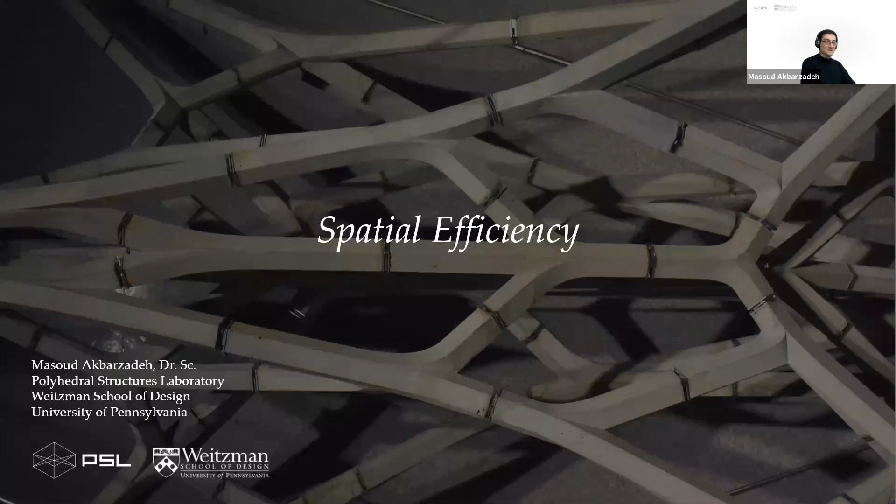Hello, everyone. My name is Masoud Akbarzadeh, and as mentioned before, I'm the director of Polyhedral Structures Lab and an assistant professor of architecture and structures at the Weitzman School of Design. I'm going to talk about spatial efficiency in my lecture. I will give you a brief introduction to the mission statement of my lab, introduce the graphical form finding methods that are quite intuitive but very exciting, and then give you an introduction to my main research area, which is the three-dimensional version of that graphical form finding.

And then show you some design methodology that we develop in the lab together with educational and computational packages and tools, including some theoretical research that involves both the mathematical side of the work and material and construction exploration. And finally, I conclude with nature and natural structures. So disclaimer, there's not going to be too much about robotics. That's what I'm hoping to develop, a kind of common ground so we can work together with the faculty at GRASP to develop that aspect of the work.

I established Polyhedral Structures Lab in January 2017, and currently I have 3 PhD students and 1 postdoc from ETH Zurich, and 2 other postdocs that I had last year. One of them became an assistant professor at City College in New York, and the other at University of Montreal, but they stay involved even today with the projects they initiated with me.

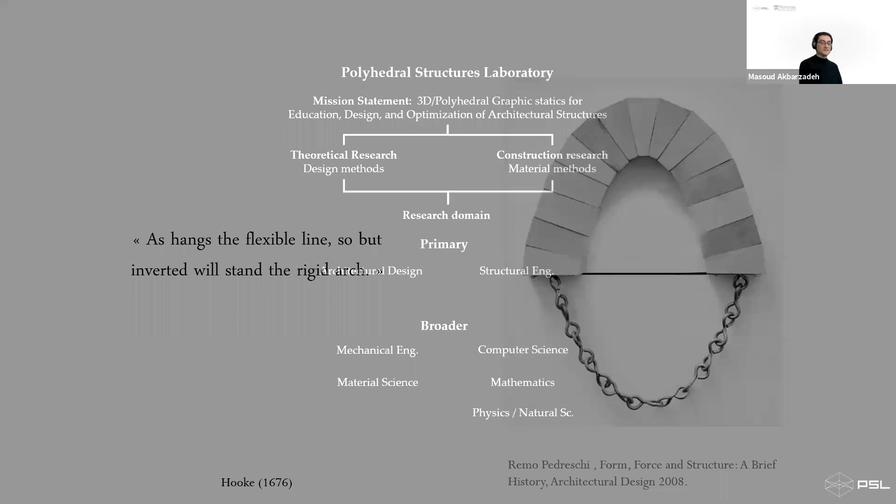I would say the primary domain of the activities is within the field of architectural design and structural engineering. But recently we were able to expand this domain to mechanical engineering, material science, computer science, mathematics, and hopefully soon natural sciences too. So before I talk about my research, I'm going to start with a simple but super important concept that introduces the efficiency in the geometry of the structures that we are dealing with.

I don't know whether you've been acquainted with this concept, but Robert Hooke in 1676 introduced a really interesting concept: if you hang a piece of chain, based on its own self-weight, it would create a form that is called a funicular form or a catenary form, and this form is in pure tension. More importantly, if you reverse that form, it would be in pure compression. Meaning that if you take a section at any point along the geometry of this form, the only internal force that you get in the section is a tensile or compressive force.

In fact, we don't have any bending moment, and always the direction of the internal force is perpendicular to the cross section, which makes the system quite efficient. So in fact, material aligns itself with the direction of internal force. So you don't have any redundancy of the construction.

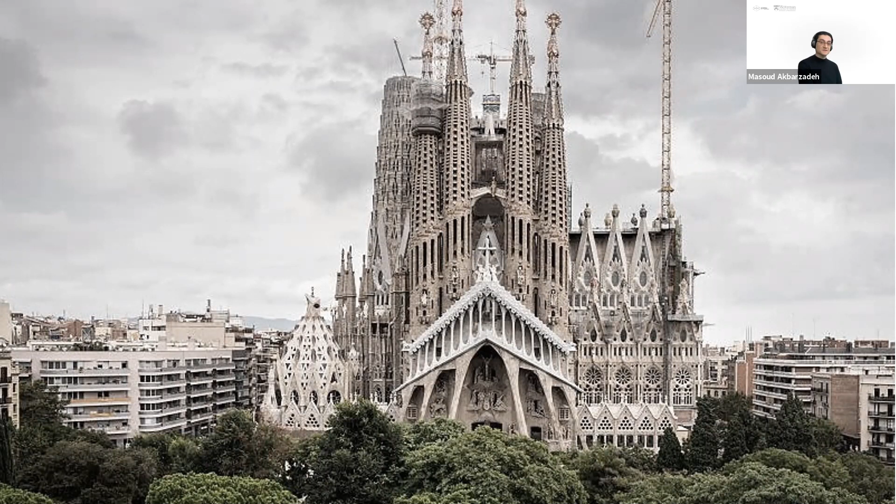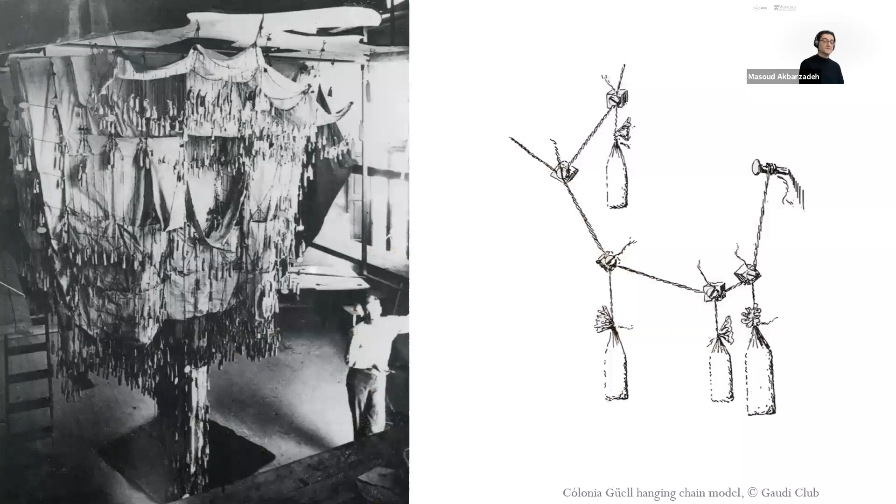If you know this concept, probably you know that Gaudi has used or embraced this concept really well in his work. In fact, Gaudi was more than a designer. He was a magician, I can call, who could elegantly combine engineering principles with architectural design. And he was taking this simple concept and building structural models for his buildings prior to any architectural design. So he was coming up with the structural form, and then on top of the structural form, he was adding the architectural detail to it.

That's probably the reason that his buildings are becoming one of the exemplary in the field that does not have any time and it doesn't age. So through the history of building construction, if you look at, there are many examples that in all these examples, in fact, the designers tried to use these funicular forms and basically utilize these funicular forms in developing spaces that clearly shows the efficiency in the flow of forces or the use of material together with the elegance, which is the inherent property of using such elegant forms.

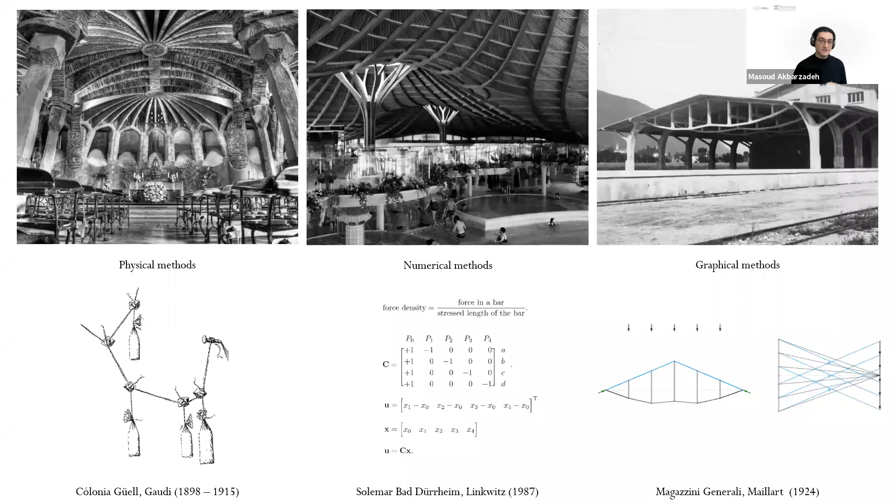So the problem of finding funicular form has become a point of interest among practitioners, researchers, designers, and engineers in the field of structural design and architecture. Right? Primarily speaking, there are three directions or the methods that you can find these funicular forms or efficient structural forms. One is the method that proposed by Hooke, and Gaudi used it a lot, which is physical form finding technique. The other one is numerical method that superseded the physical. And the last category is actually graphical.

I'm going to mainly talk about graphical because it is based on geometry. Geometry is the common language between engineers and architects. It's intuitive. Everything is explicit and you can see everything. You don't have to calculate everything, which is more preferable for architects and designers. But in the meantime, I'll show how powerful this tool is and what you can do with that.

So probably one of the most prominent examples of graphical analysis and basically instances that mathematicians became interested in geometry-based equilibrium principles are the works of French mathematician Varignon. So he was interested to investigate the geometry of funicular forms that are pure tension or compression and find geometric techniques to find the magnitude of the force and describe these forms or their equilibriums.

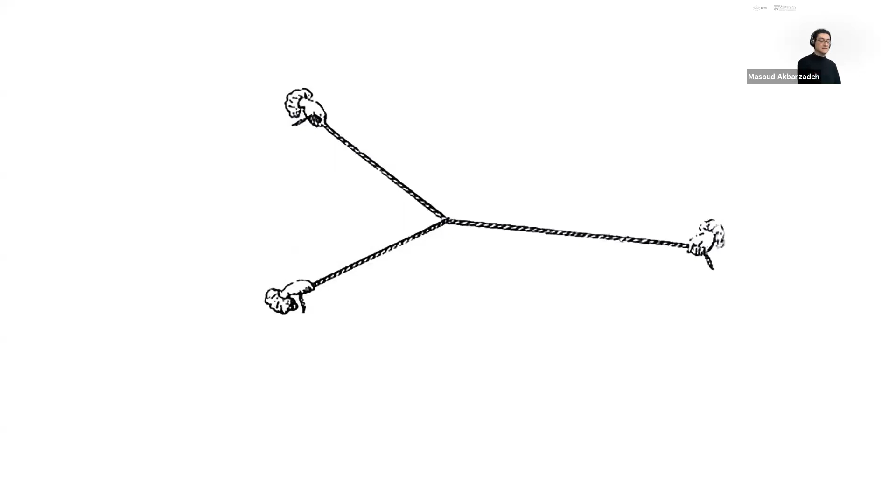So simply put, if you start with a piece of rope that has been pulled from three sides, it's just enough that you put a line parallel to each of the rope. These lines together would create a closed polygon. This closed polygon basically tells you that the system is in equilibrium. And if you measure each length of this polygon, which tells you how much force goes into each piece of rope. You probably had this concept in high school as a free body diagram or closed polygon of forces. That's exactly the same thing.

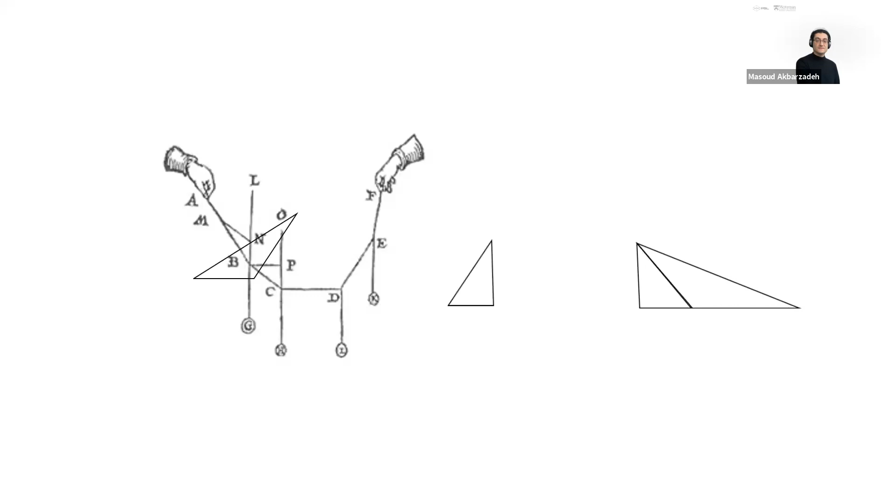So simple enough, if you have a funicular form that you have basically the direction of the applied loads and the geometry, you know that each node, the equilibrium of each node can be represented by the closed polygon. And thus, these polygons together would create a force distribution or the geometry of the force distribution that explains the equilibrium and more importantly, describes the geometry, because each edge of your geometry is perpendicular to each edge of this polygon.

This principle, simple enough, became the basis of the method that was called later graphic statics, or originally graphical statics by Culmann at ETH Zurich in 1866. So that was the first person who actually put this together in the form of a book and started to teach that to engineering and architecture students.

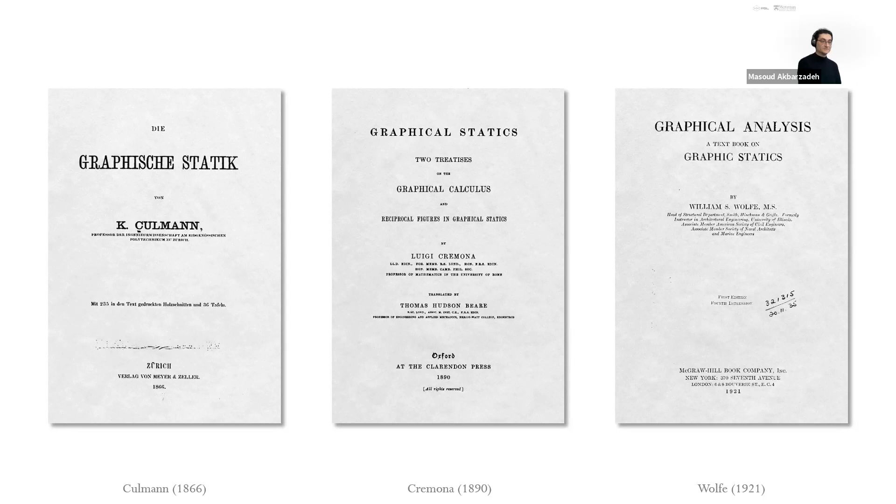So what is graphical statics? Basically, graphical statics is a tool in which you have a funicular form, that you can basically find a funicular form that is shown on the left. And you have another diagram, which is again a geometric diagram. That is the force diagram, and that represents the equilibrium of forces within that funicular form. So everything is explicit. How?

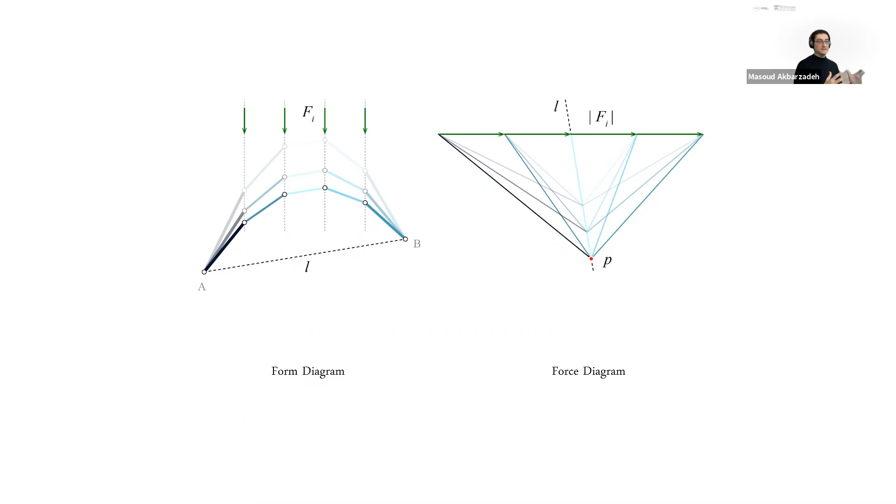We know that per node in your funicular form, you should have a closed polygon. And basically, if you measure the length of that closed polygon, that tells you how much force will go into that. More importantly, because these two diagrams are topologically reciprocal and geometrically perpendicular, you can play with the geometry of one and then see the effect of that play in the other geometry. You can basically control your funicular height and see the magnitude of the forces are basically changing accordingly, right?

Again, because everything is described using geometry, you can optimize geometrically really, really fast. For instance, in this method, the force diagram is constrained to a circle. As a result, the edge length equals the radii of the circle, right? So that means that the bottom chord of your structure would have a constant force in it. So immediately you can see why the optimization is happening and how you can control it, right?

So what does that mean in terms of construction efficiency? Well, I'll take you to the City Hall subway station in New York City. This was built in 1913 by Guastavino, and it's called Guastavino vaulting. If you didn't know, the entire weight of this City Hall actually sits on top of this vault system that only consists of 4 centimeters of 2-layer clay tile bricks with no reinforcement.

So you can imagine that it's been living for almost 100 years, even more than that. And without any reinforcement, it works really well. So why does this work? Because Guastavino, as you see in the image, was using graphical methods to find that efficient form, which is that arch, and he built that efficient form using 2 layers of clay tiles, each layer less than an inch thick.

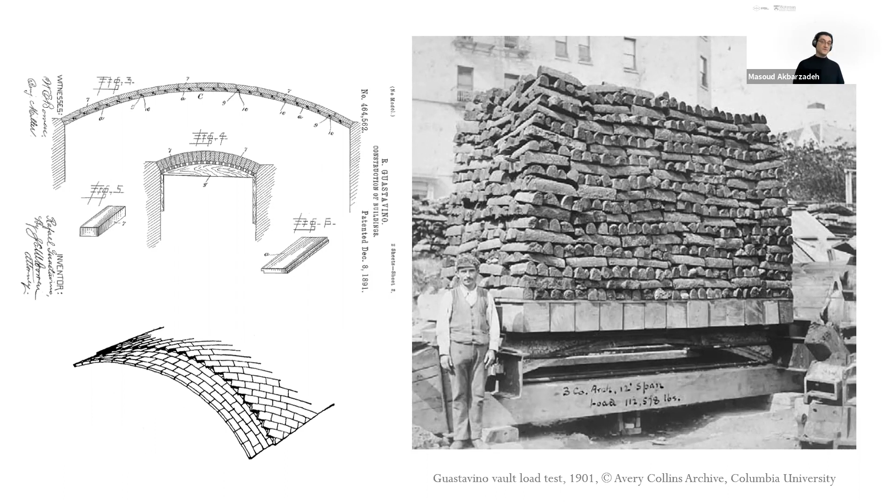And then he's showing the load testing of that immediately in front of you. This is one of his built arches, and it can take up to 500 times its own weight. That clearly shows that without any reinforcement, you can still design efficient systems, right?

Even Gaudi, who is famous for his physical form finding technique, used a lot of graphic statics to describe the geometries. This is Park Güell. If you haven't been there, you should definitely go visit this place. This is fantastic. Many people around the same time who had to work with the construction material, which was stone and masonry at the time, had to become masters in using graphical methods because the force flow that keeps the entire masonry structure in compression was necessary.

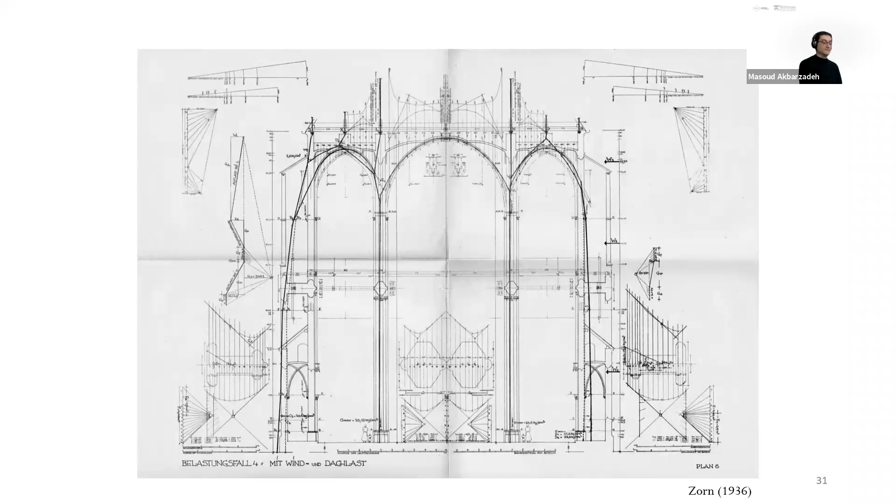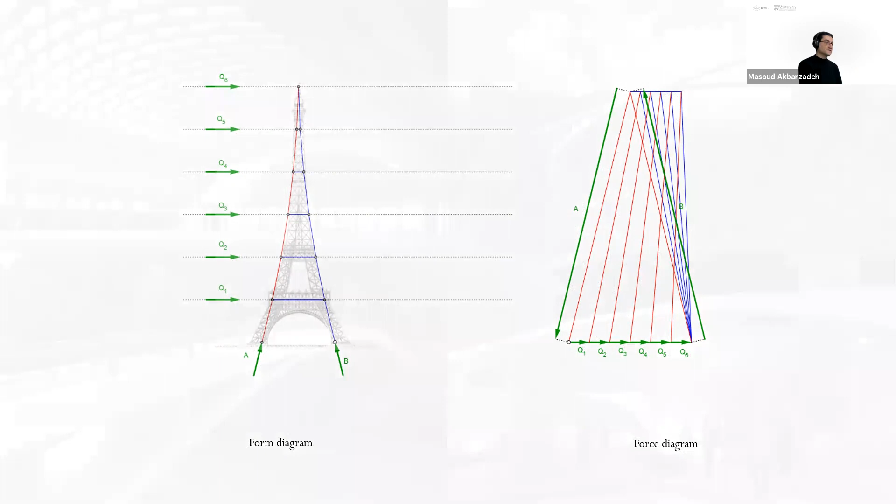This is another image of a cathedral designed by Zorn, and you can see the diagrams of forces on the corners and basically the funicular form of the arch. All right, if you didn't know, even the Eiffel Tower has been designed using graphical methods. Again, there are many examples of the use of graphical methods in the design and construction of buildings, bridges and really efficient arch structures.

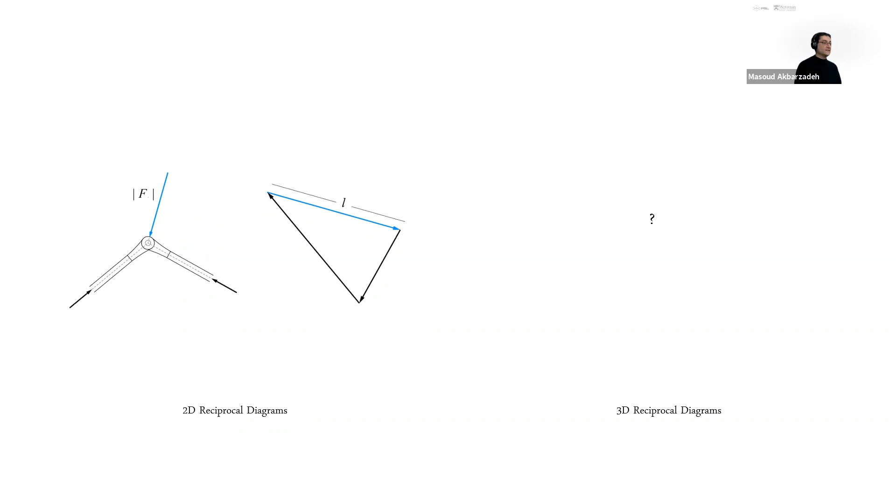But again, today with the computational tools and representational medium that we have, it's much easier to explore the potential of using this method. Anyways, in 2D, the equilibrium of a single node can be represented by a closed polygon of forces, simple enough that you can measure the edge length, and this measures the magnitude of the force in the system. What is the three-dimensional equivalent of that?

So I remember that I searched the history, the literature, and I realized that William John Macquorn Rankine, who was a mechanical engineer, by the way, in 1864 published a publication which is only half a page. This is the entire publication, from start to end. As you see, it's just 3 paragraphs in Philosophical Magazine. No illustration, no proof, nothing.

And he calls it Principle of the Equilibrium of Polyhedral Frames. And the first sentence is actually a referral to his own book, mentioning that this is the three-dimensional version of what he already proved in 2D. But the theorem is in the main paragraph, and it's only a 1-sentence paragraph. Probably that was the reason no one actually looked at this paragraph, because it was really hard to understand. I'm not going to read it for you. If you have a chance, search it online, try to read it and see what you can imagine from that.

But anyways, the gist of the story is that if in 2D the equilibrium of a node can be represented by a closed polygon, in 3D a closed polyhedron of forces can represent a spatial node in equilibrium, where each member of that node is perpendicular to a face of that force polyhedron. If in 2D the length was representing the magnitude of the force, here the area represents the magnitude of the force.

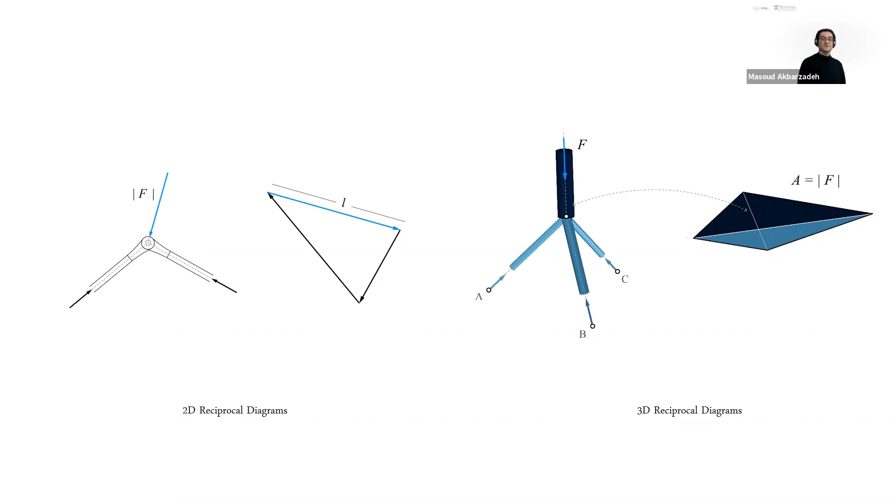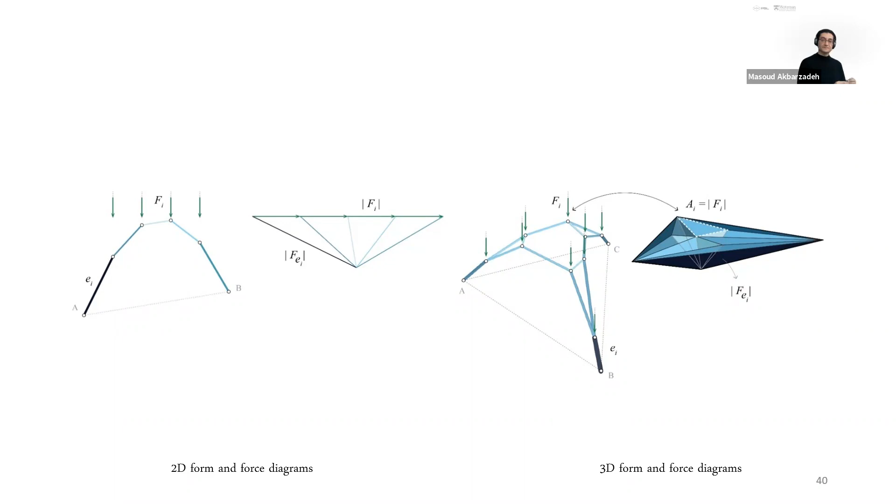If you're interested in proving that, use Stokes' theorem. Anyways, I was able to take the 2D graphical statics that existed for 150 years, I would say, to the three-dimensional version of graphical statics that are based on reciprocal polyhedral diagrams. The immediate outcome of this is that a single polyhedron that is convex and closed can represent a node in equilibrium in space.

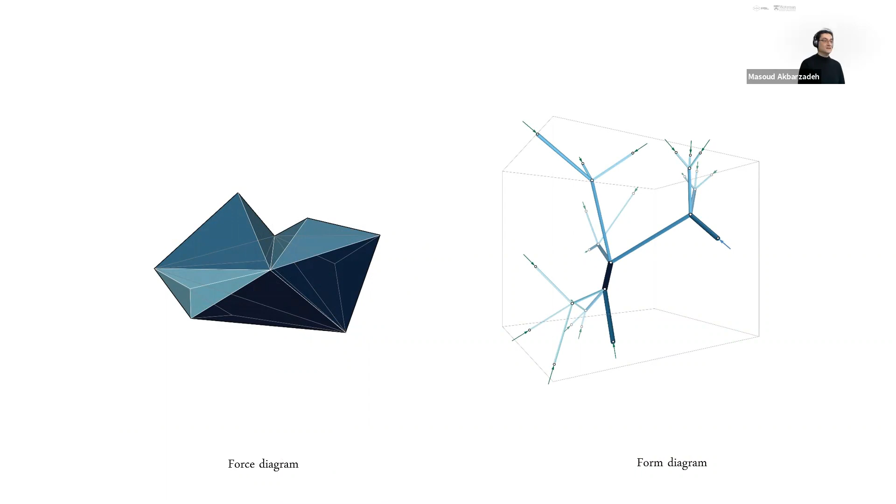That also means that if you have a single polyhedron, you can start adding more polyhedrons of forces to that, and together they can actually describe the force distribution of a spatial funicular form that was previously really difficult to find, only through certain form finding techniques. And if you had gravity and not gravity, it was really difficult. But with this method, you can immediately construct that and control its topology.

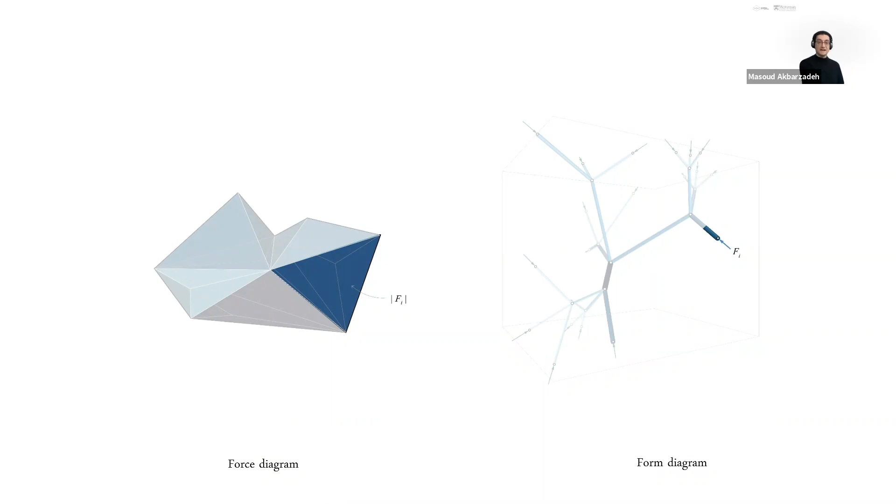Why? Because every node within your network can be described by a closed polyhedron, meaning the equilibrium of that node. And the magnitude of the force in each member or each thrust is represented by the area of the corresponding face in the force diagram. With a little bit of patience, you're able to assemble force diagrams from which you can derive non-conventional spatial structural forms. So this is the key.

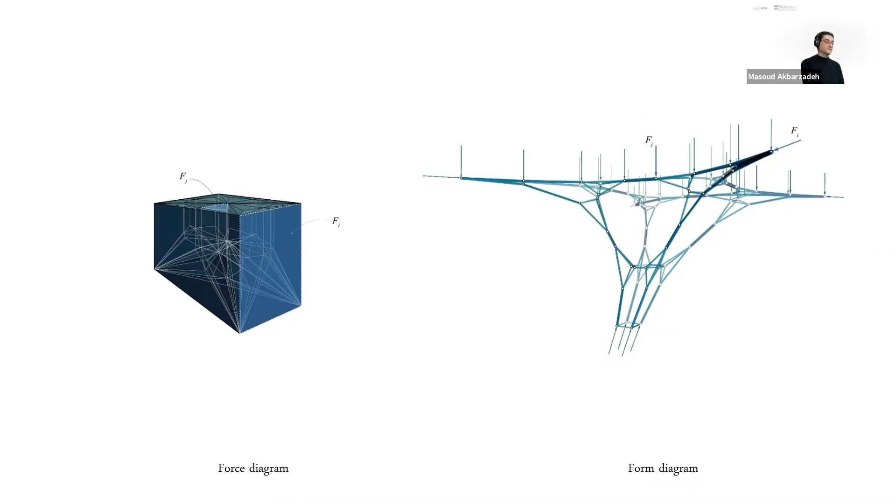We do not start from the form diagram. We do not start from any arbitrary form and try to optimize it. We start from a force distribution that we know is already optimized. We know that any structural form that you extract from that would be in equilibrium. So we can control the topology and also guarantee that the result would be in compression or tension or the combined version of this.

This is something that I teach to graduate level students at Weitzman, and they make physical models of that. The moment they make these spatial tensile models, they realize that the entire thing actually works and the principle holds. Through these they're able to explore a variety of different spatial equilibriums that can be used as architectural spaces, architectural structures.

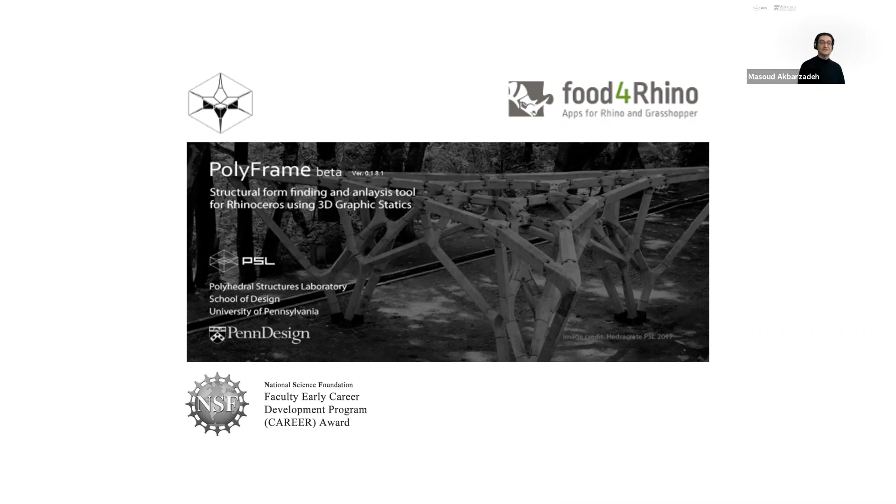Obviously, if you want to do this by hand, it's not feasible. It's going to take a long time. So we developed a computational tool for that. It's called Polyframe. It's a free plugin for Rhino.

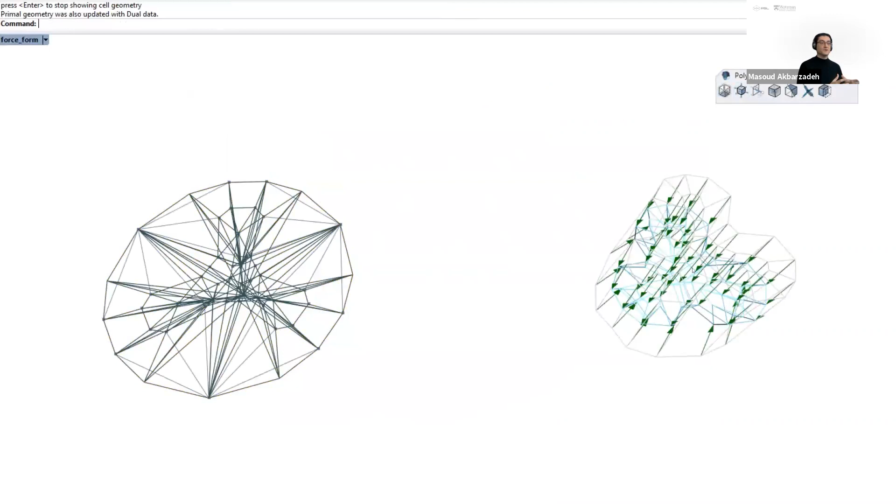There you can design the geometry of your force diagram and extract the topology and the geometry of the form that would be in equilibrium according to the initial force distribution that you as a designer chose. You can constrain your geometry and play with the geometric degrees of freedom, the edge lengths, within the states of equilibrium without breaking that equilibrium between the form and the force diagram.

Moving to the first built structure, this was built as the first manifest of the method, in a workshop that I taught for the first time after my PhD, right when I started my career at Penn, at the Institute of Contemporary Architecture in Tehran. The students really pushed it. I was afraid whether this was going to work to begin with, but they really wanted to build a structure, and they finally did it. That's fantastic.

What you see in this structure is a self-standing structural form. It's like a branching system, but it is quite unique in that the entire body, except the top chord, stays in pure compression, with almost zero bending moment. The top chord is actually in pure tension, and the self-weight of the top chord keeps the rest of the members underneath in equilibrium.

What you see is a structure of 10.80 meters by 9.30 meters. In the widest span it's 5.40 meters, and the height is 2.80. Because we were using geometry-based structural design methods, we were able to define the boundary conditions in advance, and then we designed it as a compression-only spatial structure. So there are support locations at the top chord of the system and also on the bottom.

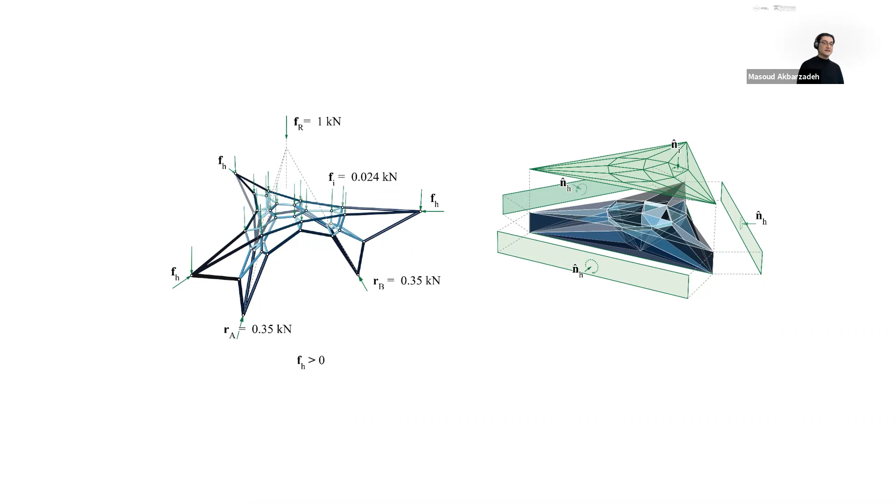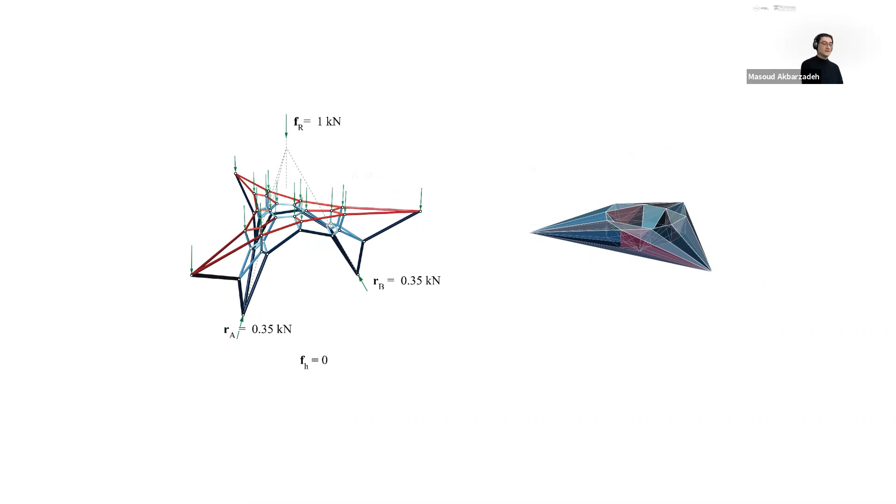But we knew that we are not going to be able to support the structure on the top chord. So how can we keep the system in equilibrium? If there is no horizontal force at the top chord, we know that we can manipulate the geometry of its force diagram. The geometry of the force diagram is represented by rectangles here, right? So we can make the areas of the rectangle become zero, which eventually makes that rectangle become a line. As a result, it would change the force diagram to this configuration, and the top members would fall into tension. So we went ahead and materialized it.

But there was another point, because we knew that, first of all, there's not going to be any additional force on that. This is a self-supporting structure. We have to have applied load to keep the bottom part in equilibrium. And we also knew that concrete is not going to take any tensile force. So we wanted to make the top chord out of concrete to use its self-weight, but we had to develop particular detailing for the top chord.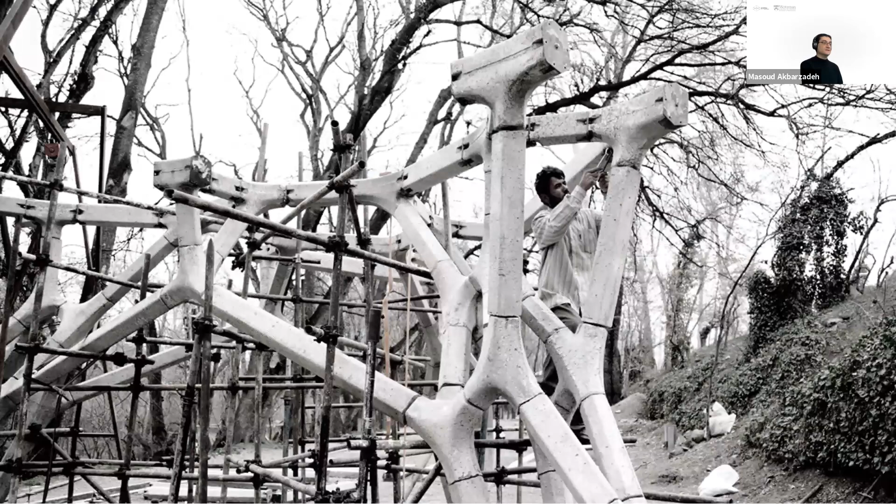So we came up with some plates that were precisely cut using water jet, and then inserted some parts that could precisely transfer the tensile force between the top chord to make sure that the entire thing is in equilibrium. And then we can use its self-weight to keep the system in balance, right? So these are some of the images.

Initially, this is in a historic site close to the palace of the Shah, if you know. That was prior to the Islamic Republic. Anyways, it's a very important historic site. Initially they told us that this was going to be temporary, but they liked the piece, so now it's permanent. So it's fantastic.

Anyways, to give you some idea about the efficiency of the system: the entire concrete used in the construction was 3.5 cubic meters, distributed in 50 cubic meters of space. And the load bearing capacity is about 1,000 kilonewtons. Just imagine that we would like to design the same structure using conventional methods, posts and beams with the same material. The ultimate load bearing capacity that we can get from that is about 82 kilonewtons.

As you see, there are beams, and this frame is designed for bending moment, while the left one is designed for no bending moment. So if you want to make the conventional system withstand 1,000 kilonewtons, you have to increase the concrete used by 330%, and the rebars should be increased by 10%. So you can immediately see why the system is more optimized in terms of the use of material, in terms of carbon emission, et cetera.

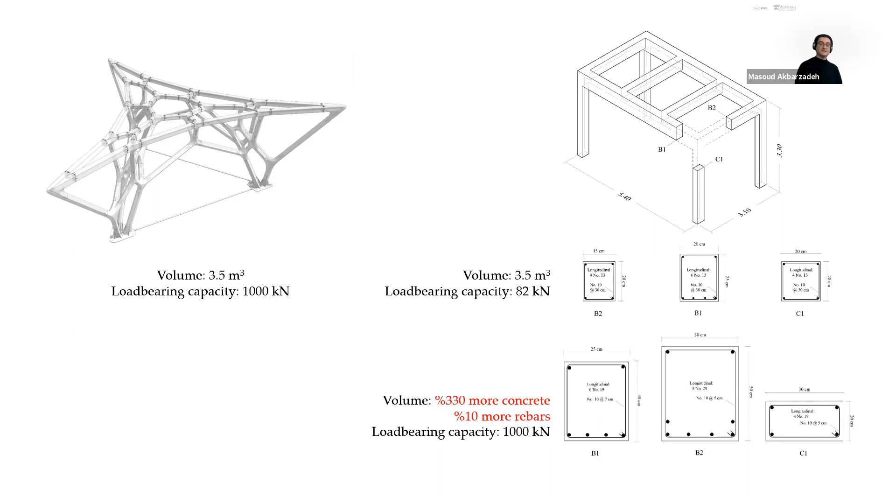The next exercise that we had was to investigate the mechanical properties of such systems. We were inspired by the very famous American Concrete Institute test, which is a cylinder, and they would crush it to understand the compressive behavior of concrete. Obviously, if you use topology optimization, you would find the force flow and the amount of material you can reduce. So we took the same boundary geometry, applied the same method, and designed a topology for that geometrically. So there is a compression-only structure for us.

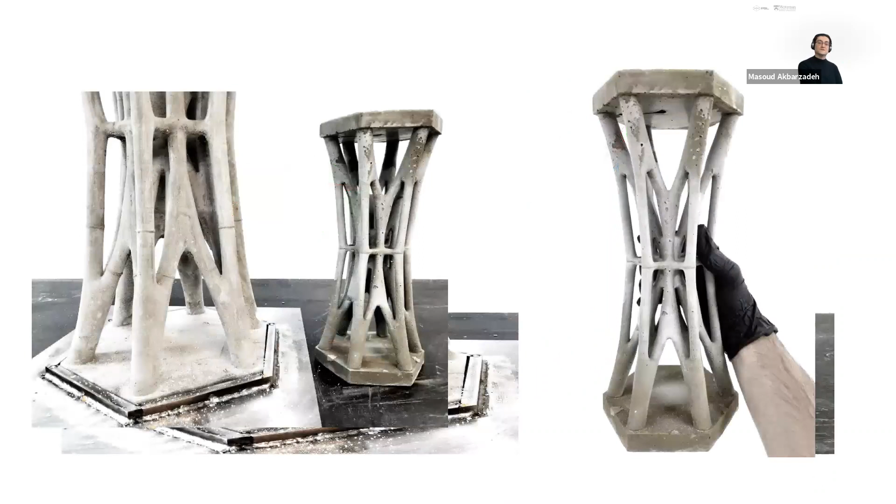We fabricated it in two different scales, but the size was 2 feet tall by 1 foot. We did the load testing, and it was surprisingly high. The entire weight of the sample was about 25 pounds, around 12 kilograms, and it could take about 55,000 of applied loads, right? The most interesting part was that the entire system exploded at once, which again proves the efficiency of the system, because if you size the members according to the areas of the faces, you are going to have a constant stress field inside your structure. That also means your structure should explode at the same time, right?

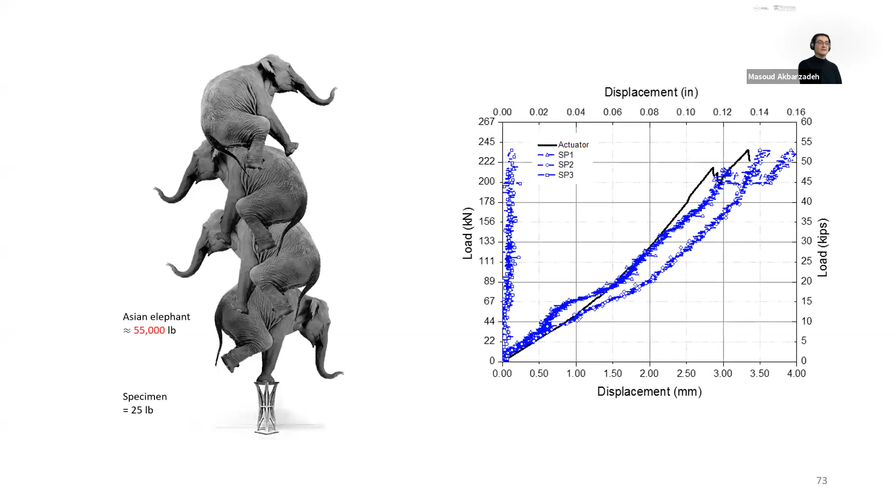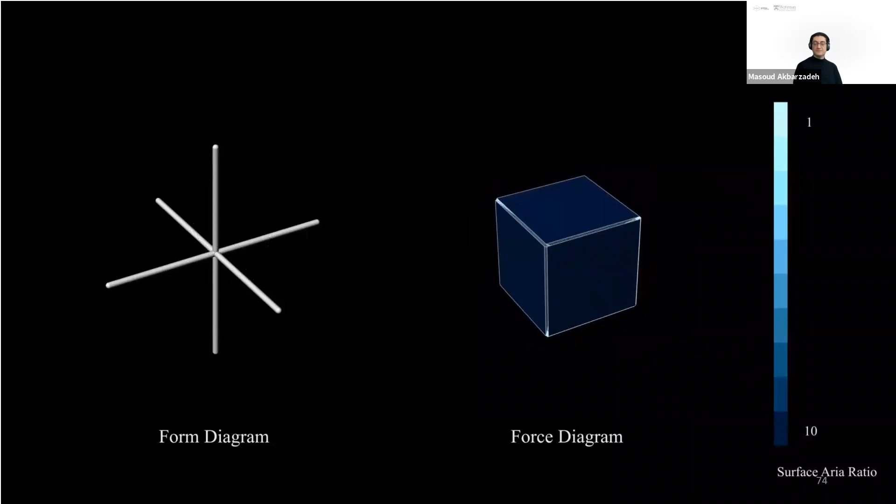Now, remember, we're using geometry to design it, right? So there are many different ways that you can subdivide these polyhedral cells to change the topology of the system without changing the boundary condition. In fact, as opposed to common topology optimization, where you derive a certain topology as a result, you can play with different topologies in our method. As a result, for the same boundary condition, you can have a variety of different topologies that are compression-only, but with different diameters of members and different valencies of the mesh, right?

So this inspired us to look at the properties of these samples that can be generated using subdivision techniques of the force diagram. And what we realized is that subdivision at the boundary condition, together with subdivision of the members in the body of the system, can significantly improve the load bearing capacity, up to even 3 times.

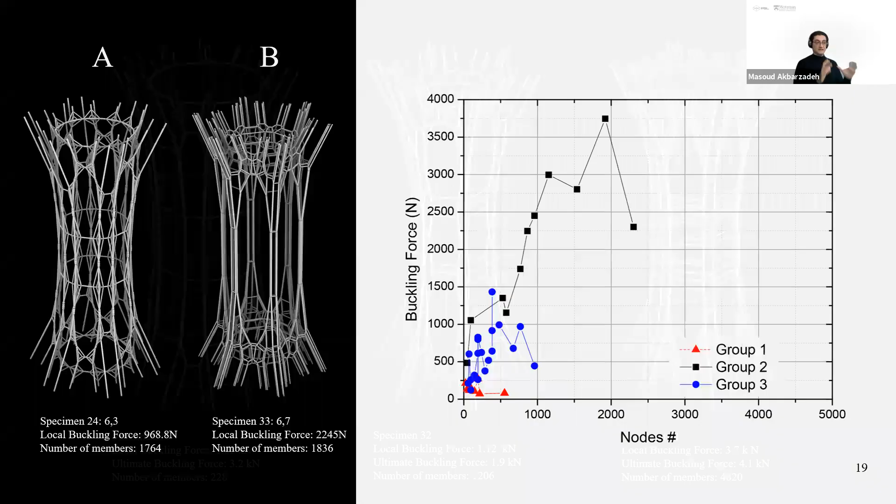Now, the difficulty and the challenge was, okay, these are super intricate structures, and constructing these would be challenging because of the spatial quality of that. Let's leave those here. I'll get back to this problem with the current research at the end of my presentation.

But obviously, we are in a design school. We have to showcase some of the work that we are doing in a design piece. You remember I talked about how a convex cell can represent the equilibrium of a single node that is in compression. Well, not always can the polyhedral system be convex. In fact, you can have self-intersecting or non-convex force distributions, right? How do you describe systems that work with those? And more importantly, how can you control the polygons as a result of these self-intersecting polyhedrons?

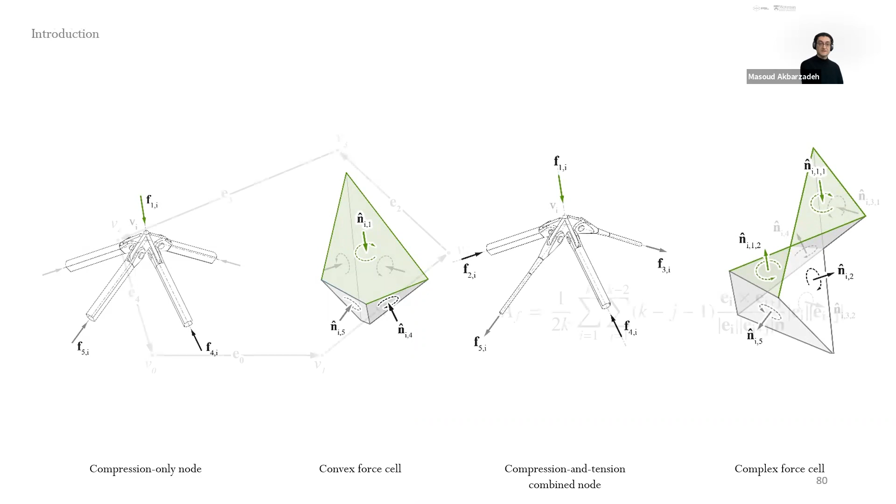So for that reason, we developed a quadratic function that could describe the geometry of the polyhedral system using the edge length. And that allowed us to control the areas while constraining certain edge lengths. One really important aspect is that since the area represents the magnitude of the force, self-intersecting areas have two different regions, and the sum of the areas in the two regions with a sign represents the total magnitude of the force. It means that if you have a region that has a flipped normal direction and its area is equal to the other region, in total it makes the area of your polygon 0.

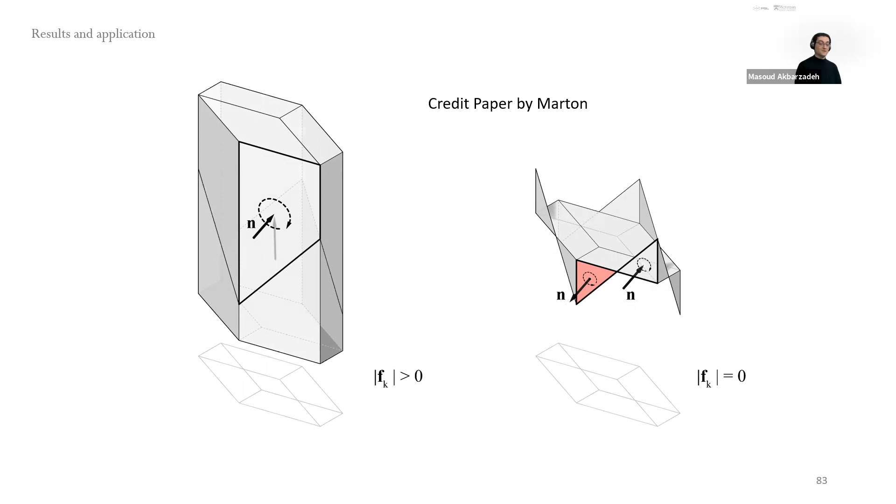This is super exciting because now we can start with compression only, and then we can force that force polyhedron to have zero-force members. Why is this useful? Because, for instance, you can have a structure where you remove all the surrounding forces or horizontal applied loads, and design something that is utilized only for one direction of load and the reaction.

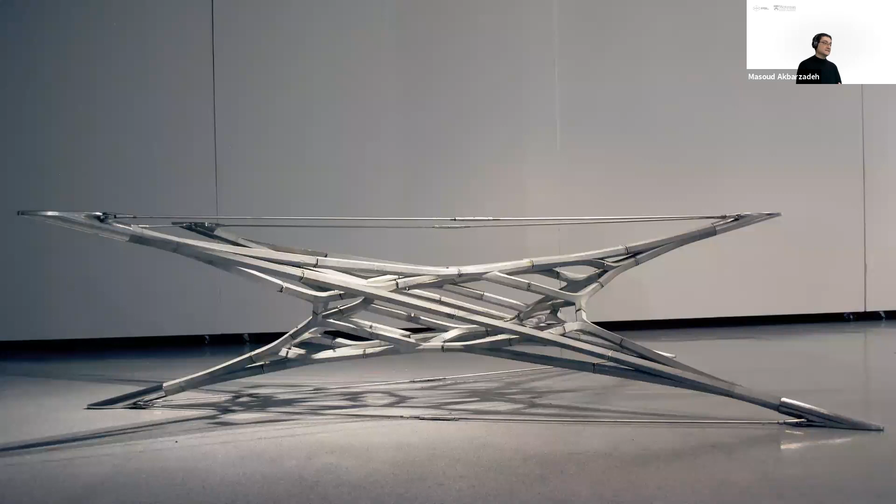So this was the structure that we designed according to that. All the horizontal forces are 0, and the top chord and the bottom chord become tension to keep the body in compression. If you're interested, the relative density of the structure is only 1%, and it can take up to 500 kilograms of load, right?

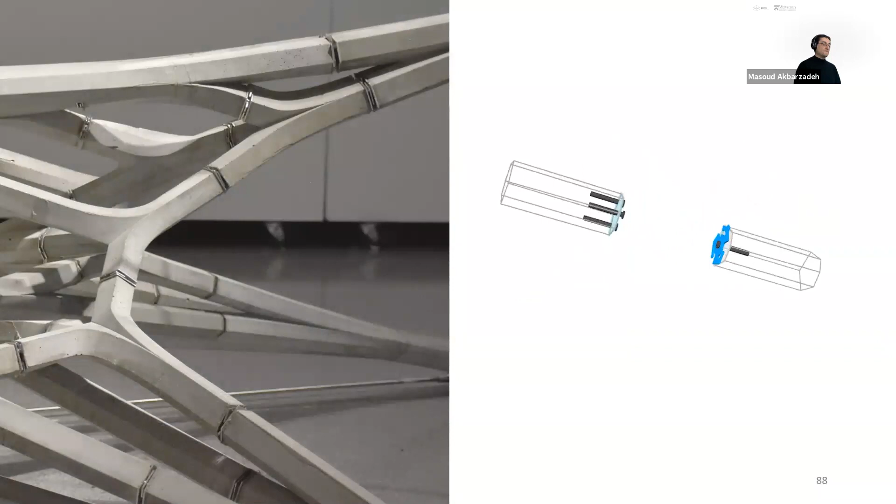But there is another invention here. Because we were using node-based assembly, this makes the construction super hard because of the collisions you might have during assembly. To address that problem, we came up with a particular detail design that could lock the members in space as long as you have two members available. So this makes the assembly of the structure quite simple, right?

We used some analog methods of construction and 3D printing for the formwork; we 3D printed all the parts, demolded and assembled them together to showcase the elegance and the efficiency of the structure. This was exhibited at the AIA Center in Philadelphia, supported by the Center for Art and Architecture, and received, by the way, the A' Design Award last year.

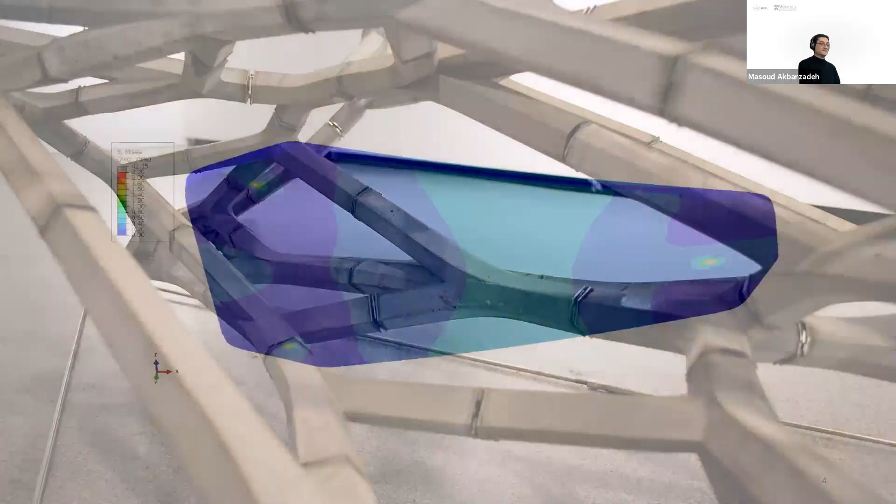So I'm showing some of the built examples, but the challenge was the tabletop, which was meant to be built out of glass. We realized that to support glass that spans 12 feet, we would have to use glass 2.5 centimeters thick just to withstand its own self-weight, not even the applied loads. So this clearly shows that you have to design a system for bending moment, right?

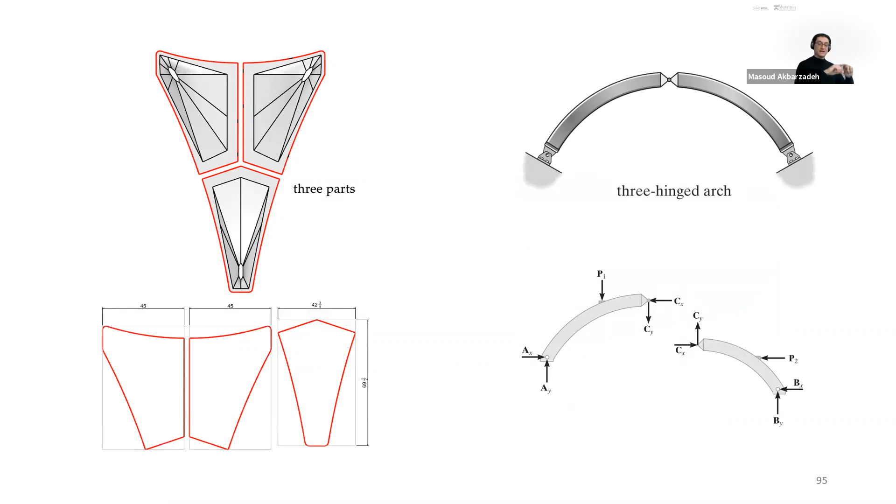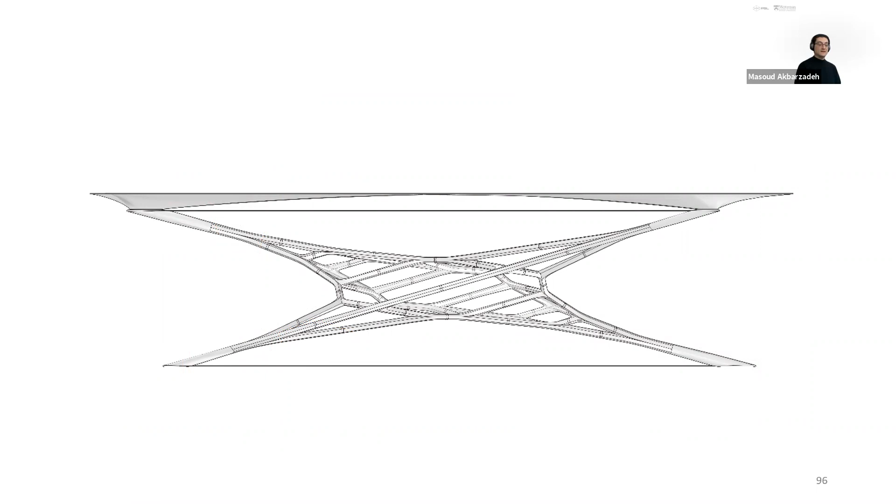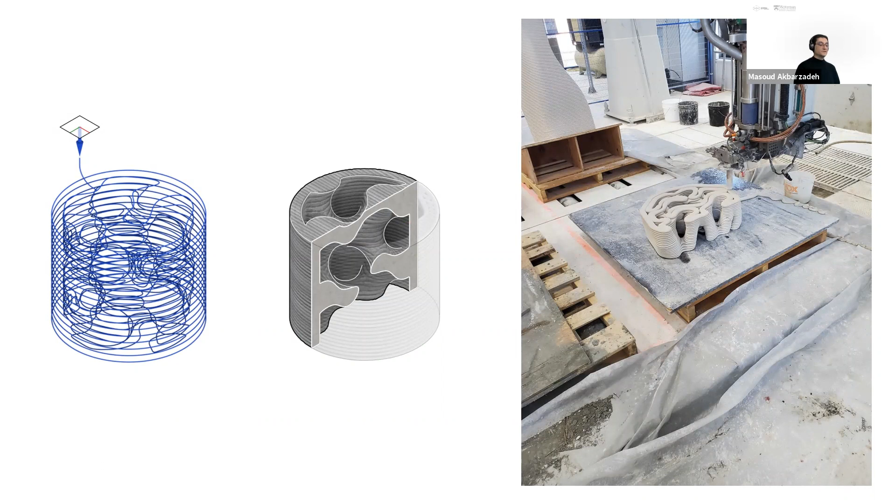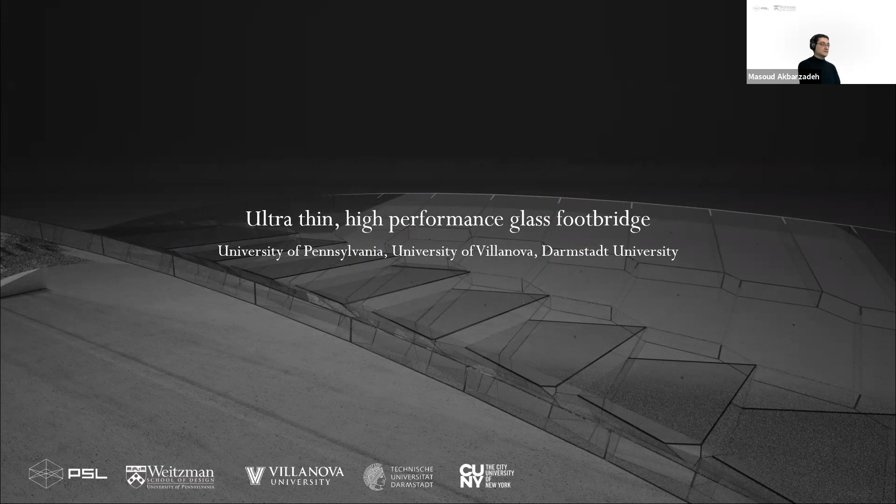Another ongoing project that I wanted to talk about is related to an ultra-thin high-performance glass footbridge that we're working on in a collaboration with Technical University of Darmstadt and Villanova University. So, as many of you might know, the form finding process is not the entire design to construction step, right? Once you find the form, you still need to rationalize it for construction material.

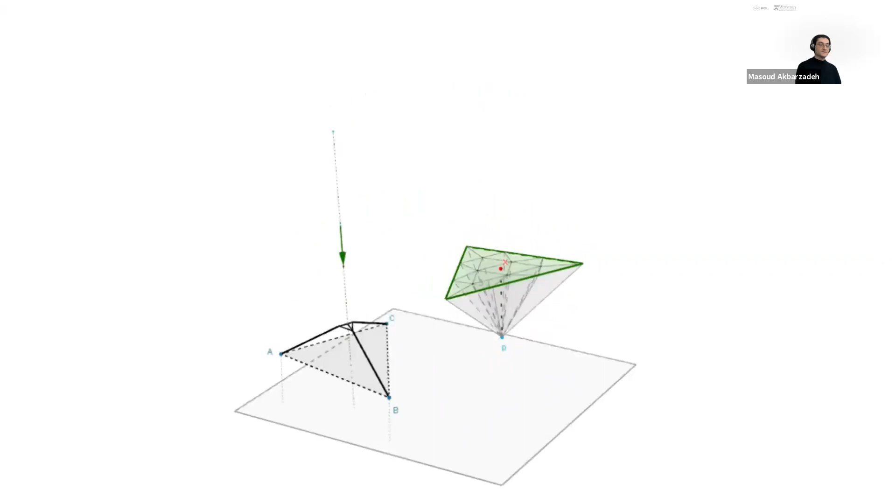So I'm going to show you a simple example that is developed using graphical methods in 3D based on reciprocal diagrams. And I'm going to show you how this simple example can immediately turn into something exciting by simply subdividing the force diagram as it's shown here, which is just a single tetrahedron, a single node in equilibrium. If you change the topology of the force diagram by subdividing it, suddenly the topology of the equilibrium structure will change, right? It would go from a single node to a shell.

So this is very exciting. Yes, okay, we discussed this. Yes, you have control over the geometry of the form. You can control the force distribution. But more importantly, you get all the faces planar. That means that with the same technique, you were able to combine both form finding and fabrication. So you can have control over everything.

So this actually inspired us to go for a structure made out of glass that is compression only, and also made of very, very thin pieces of glass that shows clearly the efficiency of the system. Also, we were aiming to eliminate any kind of additional detailing, like metal detailing that you usually see in glass structures at Apple Store, etc. We wanted to eliminate all those things and really concentrate on the glass property. Why?

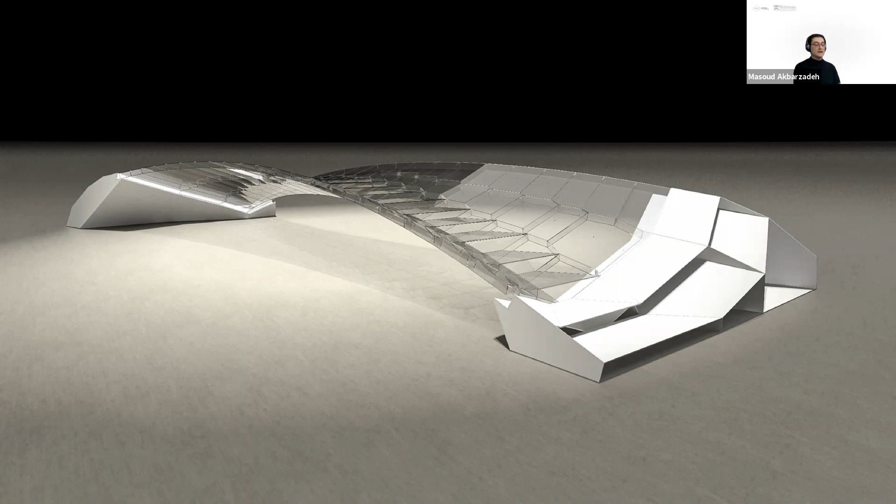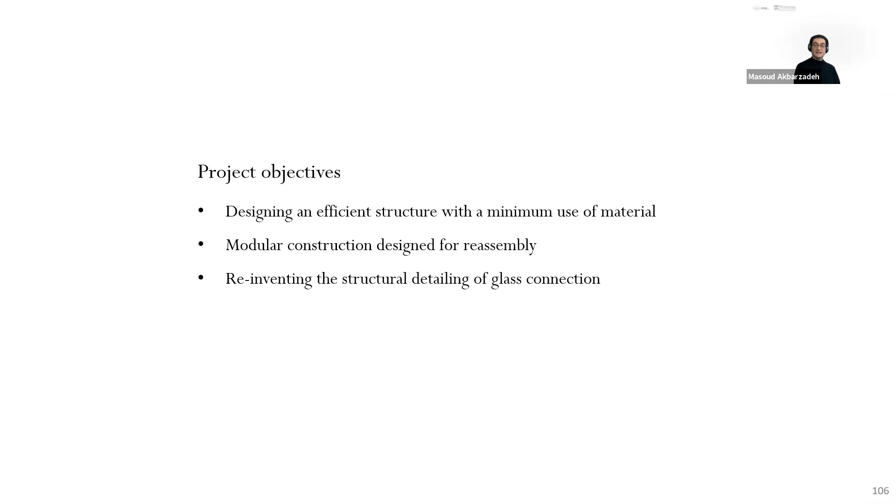Obviously, because we can explore these equilibrium states and use the polyhedral geometry. But more importantly, we wanted to show that you can minimize the use of material. You can design glass structures that can be modular, so you can build blocks and assemble them together for a bigger structure. We can reinvent the structural detailing and put the emphasis more on the glass.

And more importantly, if we can do this using glass, which is one of the most difficult construction materials to work with, you can apply this to any sheet-based material and show the efficiency and efficacy of the method. So we did the preliminary study. Yes, the FE works well. Now we need to dive into the detail. The construction detail is actually where the devil is, right?

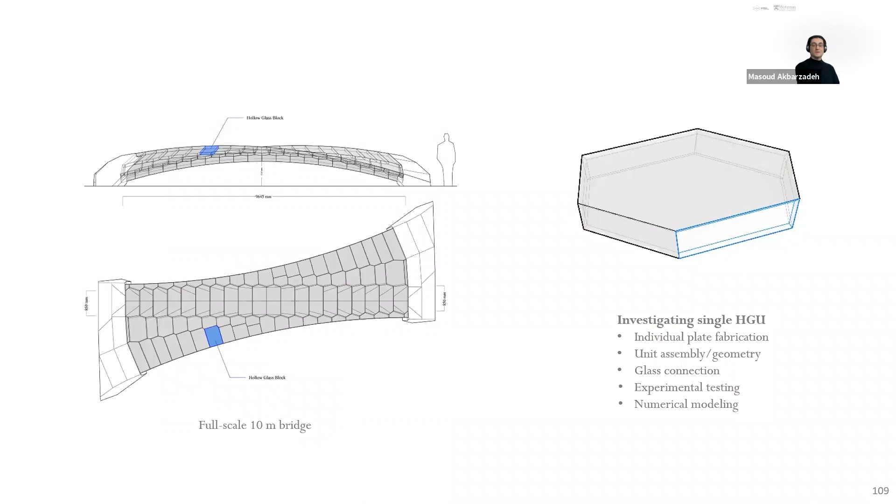So we decided to make the structure out of closed polyhedral cells, similar to the same technique. And these polyhedral cells should be made out of glass. So here we are using a 5-axis water jet machine to cut the edges of the glass at a precise angle, so we can put together this glass cell. Right now, we performed the preliminary studies on the load testing of this glass cell. It's called a hollow glass unit, or HGU.

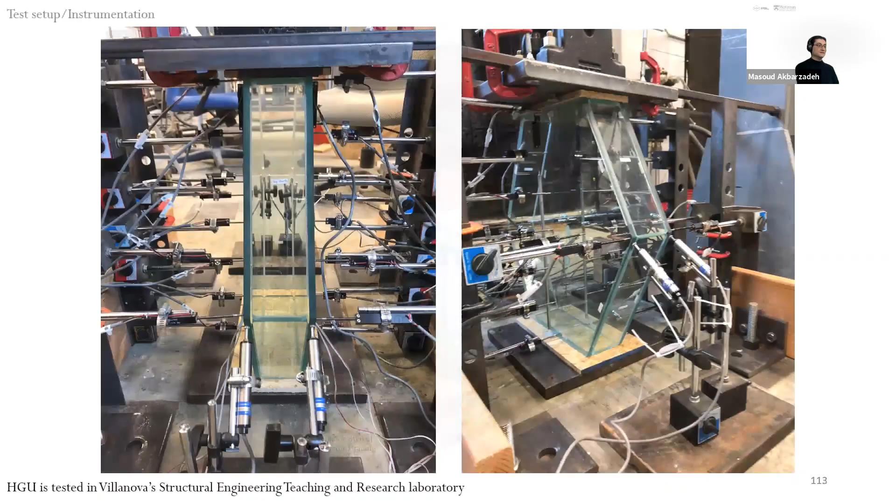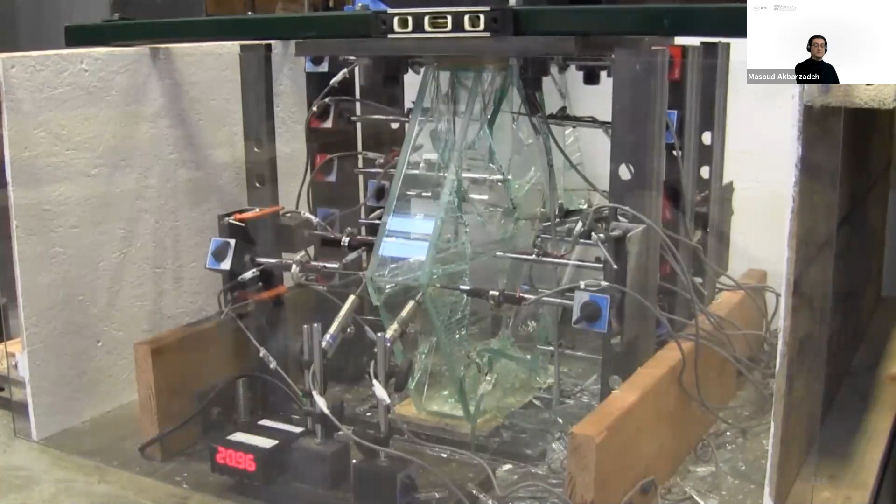And you can see it yourself, the bottom red number shows the load in kips. So 37 kips of load for a float glass, or basically window glass, which does not have any additional layers of reinforcement. And it is quite cheap, and it is held together with a tape. It is quite inexpensive, very much like a double-sided tape, but it works for glass construction.

Anyway, the single unit showed a really promising result, and probably you saw this model at the Pennovation. If you pay attention to the second floor, this is the model made out of plexiglass sheets, as a demonstration piece. Hopefully, we will be able to complete the bridge by 2022, meant for Glasstec in Düsseldorf, Germany. But I will keep you posted. This is a work in progress.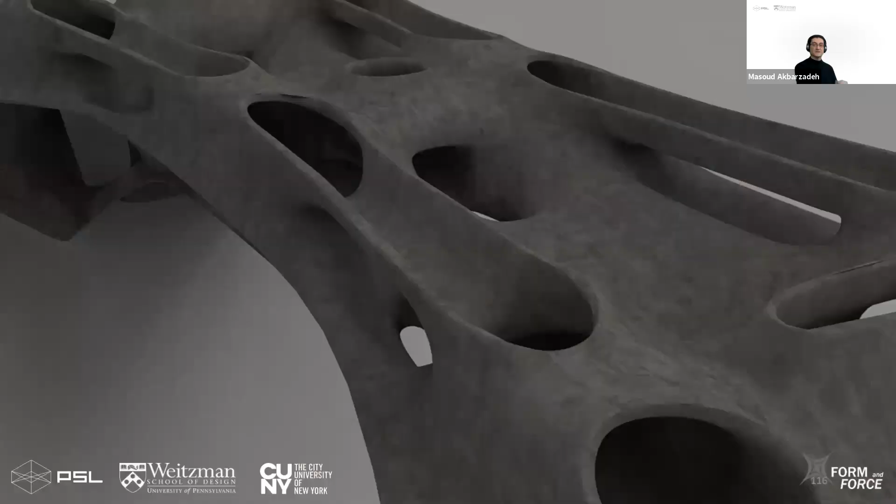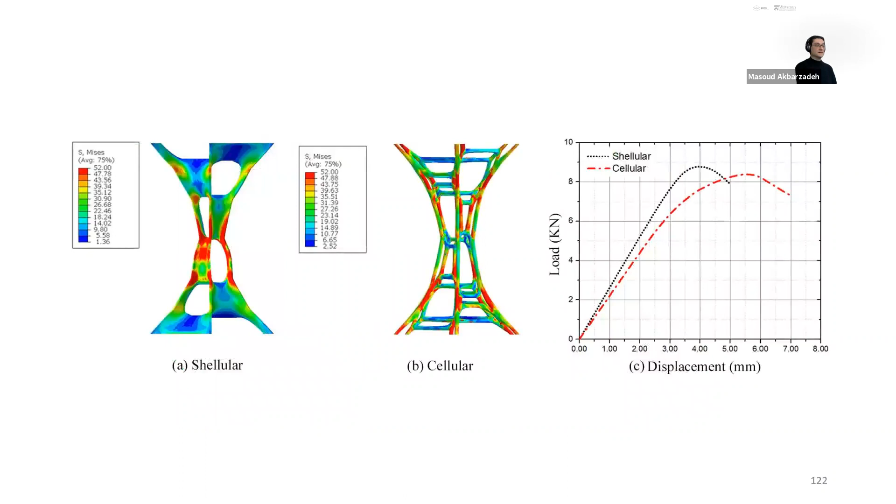You remember I was talking about the buckling performance of funicular forms and the spatial forms. This is new research by my PhD student, who is looking into the possibilities to take the cellular structure and translate it into two-manifold shellular systems. Using this technique, we are able to overcome the construction problems and generate a shell-based spatial system that can withstand the applied loads. Again, it can be improved by a factor of 3.

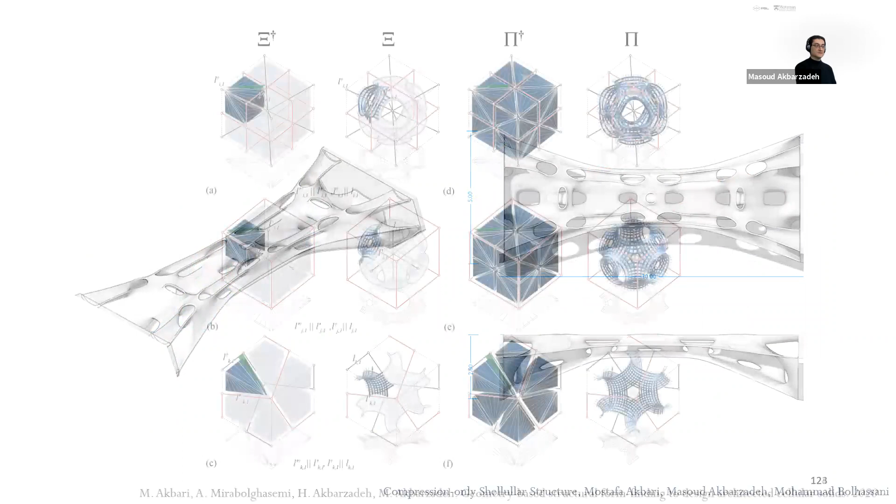So this is also the basis of the research that we're taking to cellular materials, and we are pursuing that with McGill. And also, we were very lucky to be invited by Professor Shu Yang, and we received the National Science Foundation Future of Manufacturing grant, which is based on this method.

I don't know how much time I have. I'm almost at the end of my presentation. I was just wondering, because I see you're on.

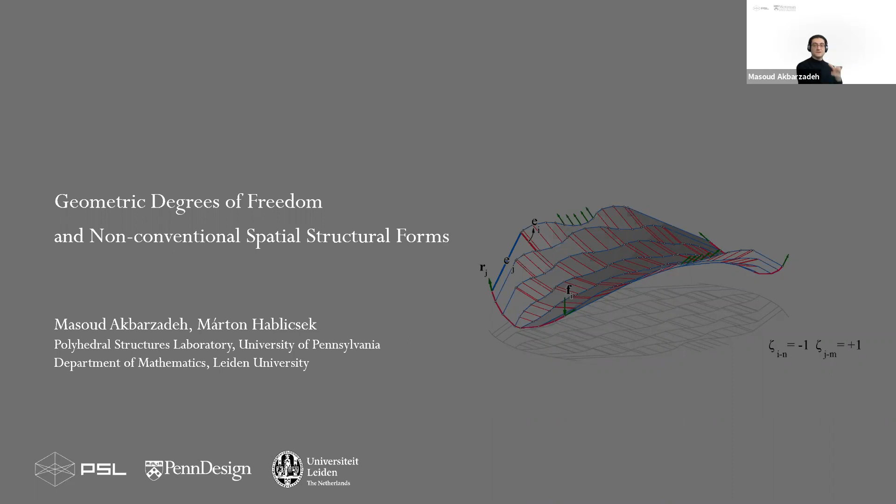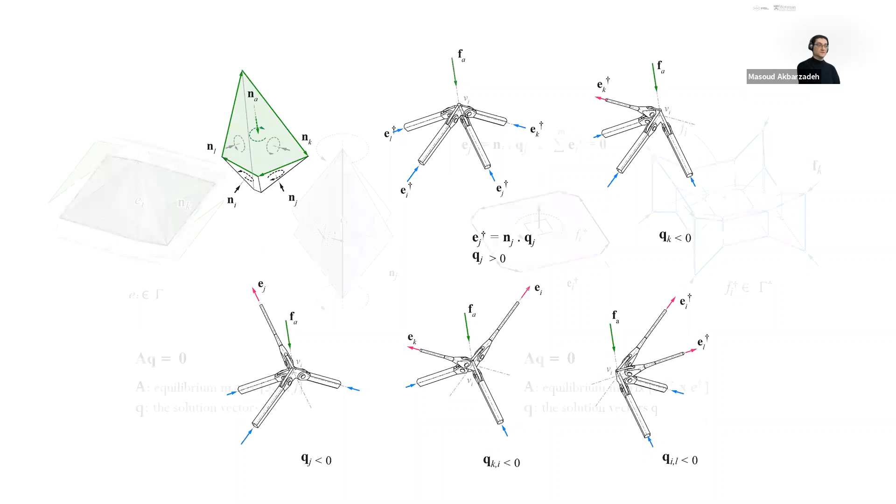So I'll actually show you another recent study. So far I was talking about, first of all, convex systems. I was talking about self-intersecting. But it's also important that you know that for a single convex system, you are able to describe the equilibrium of compression and tension members, right? You can actually push one of the compression members to go to the other side and it will become tension, right? So as a result, you can describe a variety of different geometries of the structural forms for the single force distribution. So the algebraic formulation of graphical methods that we investigated allowed us to have basically control over states of equilibrium for the same force distribution.

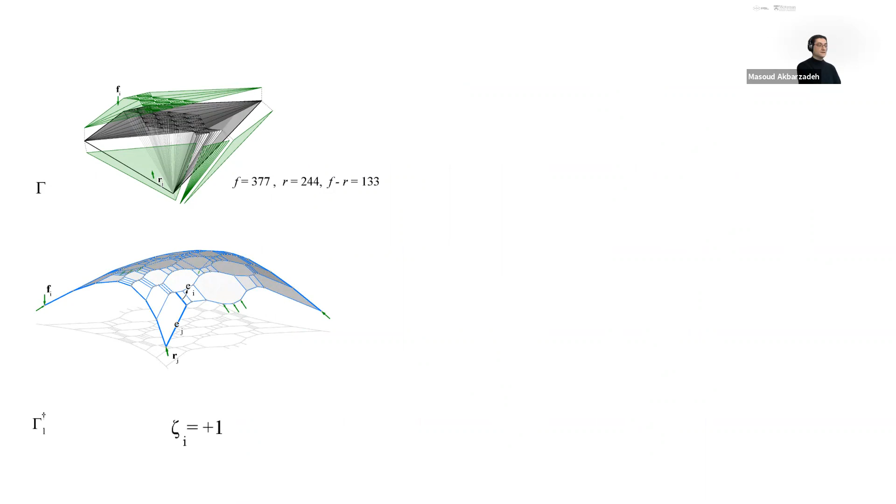For instance, this is an aggregation of convex polyhedral cells that in a common case represents a compression-only funicular synclastic structure. But then, because we can reparameterize the solution space, we can basically force certain members to go into tension. And as a result, we can have a compression-tension combined system, which is anticlastic for the same, again, force distribution. And this is another configuration for the same force. So this is really exciting, because that allows us to explore a variety of structural forms that necessarily are not convex, right?

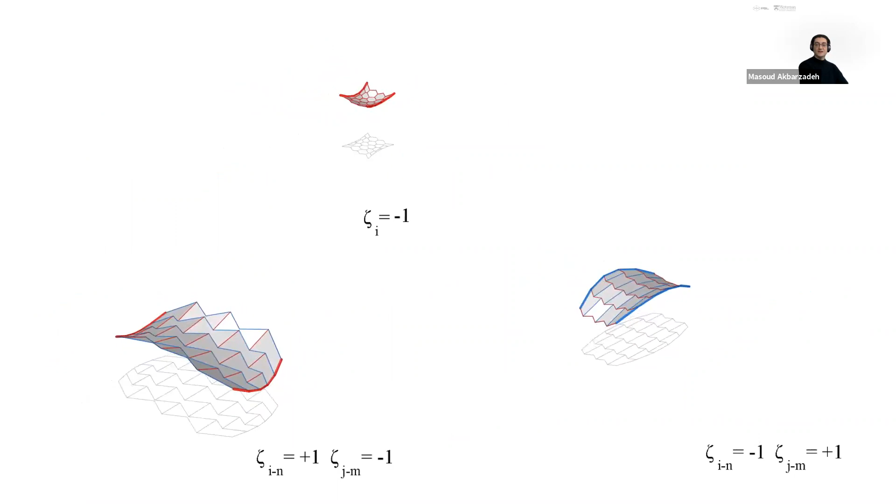So the top one is actually the same Hooke's chain that you see. If you flip a chain, you can actually get tension to compression. But the bottom ones are the new ones that were developed by us. So you can actually flip the form without flipping its force diagram, right? So why is this important? Because again, in the application in cellular solids, we can basically use the system to develop new types of auxetic materials, right, in three-dimensional space. Again, I'm not going to go into too much detail.

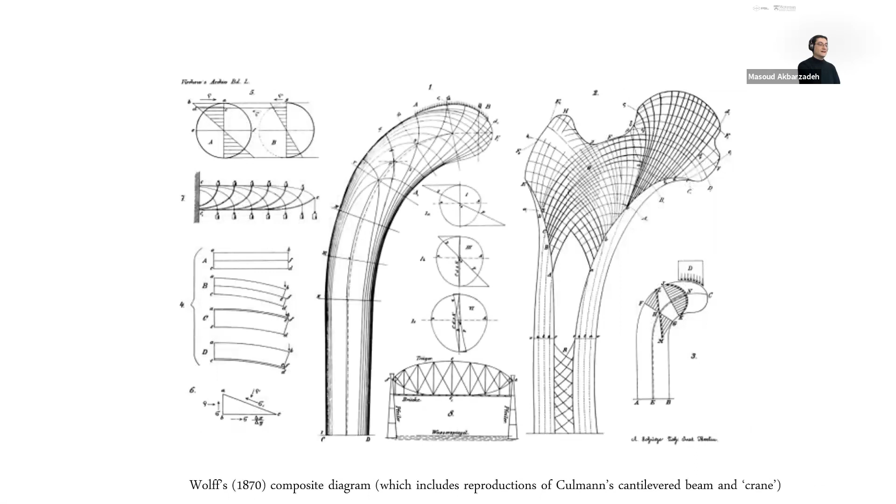Let's get back to nature to close it up. Probably for those of you who are working with natural structures, you know that nature has this tendency to distribute the force axially in its members, right? That's the way that nature actually reduces the use of material and achieves efficiency. In fact, Culmann, who was the developer of graphic statics at ETH Zurich in 1866, was a close friend of von Meyer, if you know him. And these guys basically inspired each other a lot. And von Meyer actually became the inspiration for Wolff's law later on, which basically says that if loading on a bone increases, the bone will become stronger to resist loading, right? So this actually has been taken to biology.

And this also inspired us to look into biological structures and try to find these traces of equilibrium forces, if we could describe them geometrically, right? As you see in many natural structures, you see the flow of forces in the form of pure tension or compression. So we took this idea and we investigated possibly one of the most lightweight spatial structures, which is a dragonfly wing. So we analyzed the pattern of the dragonfly wing, we took the force distribution geometrically from that, and we were able to reconstruct the dragonfly wing using the same method, and the force distribution and the thickness properly match the thickness that exists in nature.

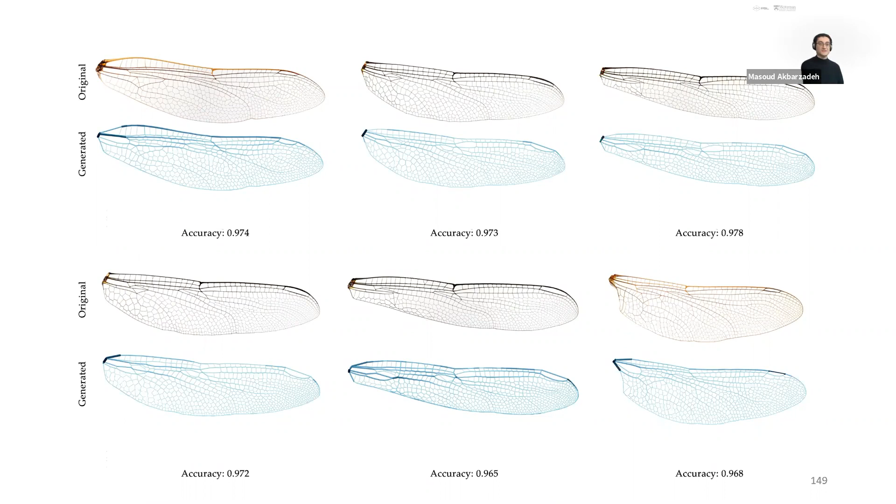So this is super exciting because it tells us for what load the wing has been designed, and it actually tells us, if we have the boundary condition load, how we should go ahead and develop that internal structure. So I'll just show this to you. This is another work of my PhD student, Hao, who's using machine learning to understand these patterns. But again, this is ongoing research.

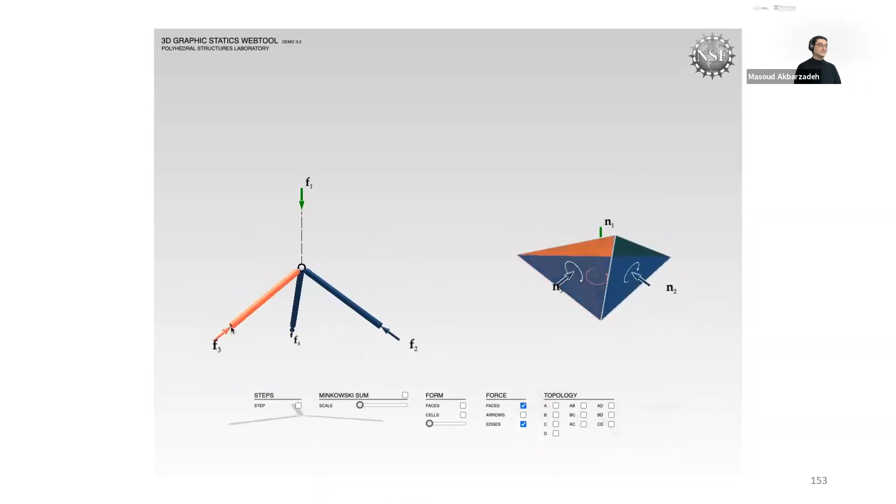And by the way, we are implementing this tool as an online web-based tool supported by NSF. Soon it will be released. This is another work of my PhD student, and you would be able, in your browser, to basically play with these and understand the flow of forces, for educational purposes, obviously.